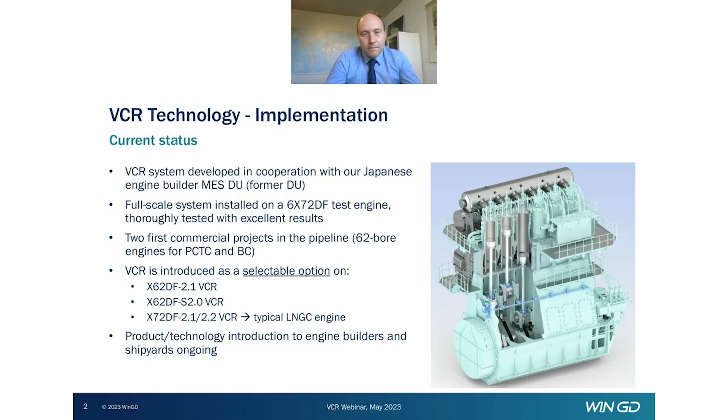What we have seen on premix gas engines in general, a rather fundamental behavior of these engines, is that the compression ratio has to be limited to a certain maximum in order to be able to run under the most challenging conditions, as we call them here.

So full engine load, hot ambient conditions, poor gas quality, for example. But this also means there is a bit of a compromise in diesel mode, where the efficiency is somewhat reduced if the compression ratio has to be limited to a lower level than what you would typically have on a diesel engine.

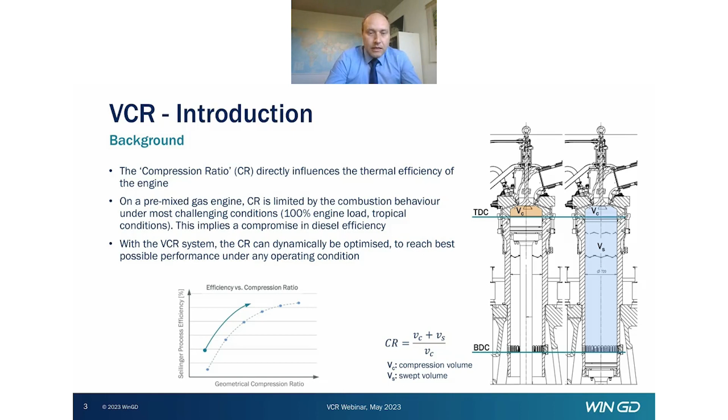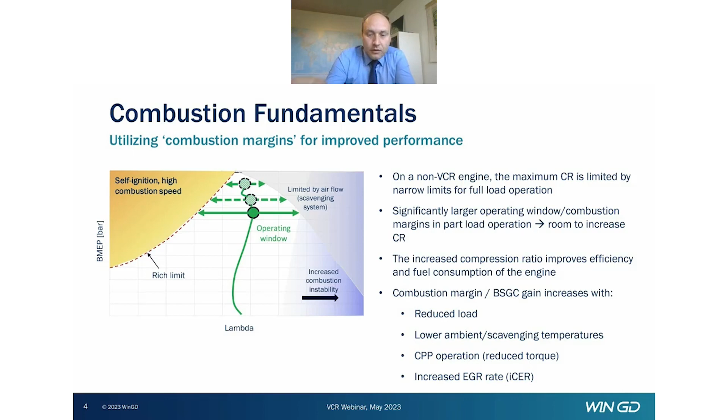The compression ratio can increase as the engine goes into part load operation, up to a maximum compression ratio that is set at low loads.

In diesel mode, though, the compression ratio can be kept constantly at a high level, similar to that of a conventional diesel engine. That also allows recovery of diesel fuel consumption to a similar level as on a diesel engine.

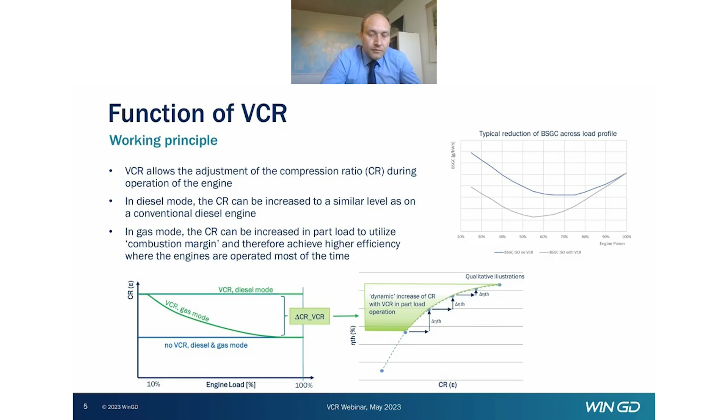So how is the compression ratio being changed? What it is at the end is that, with this mechanism that we have designed, we can change the position of the piston at top dead center.

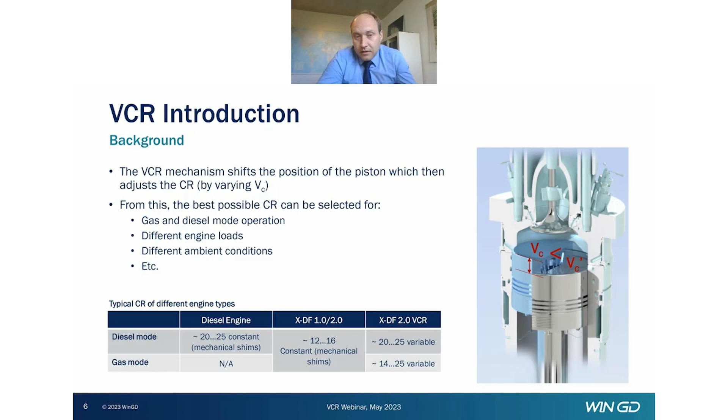The design is very simple, very sturdy at the end of the day. There are a lot of similarities with other hydraulic system designs on our engines, such as exhaust valve drives and so on. The system is designed so that we foresee no specific maintenance between dry dock periods of 5 years, so it's really quite simple and sturdy, a straightforward design.

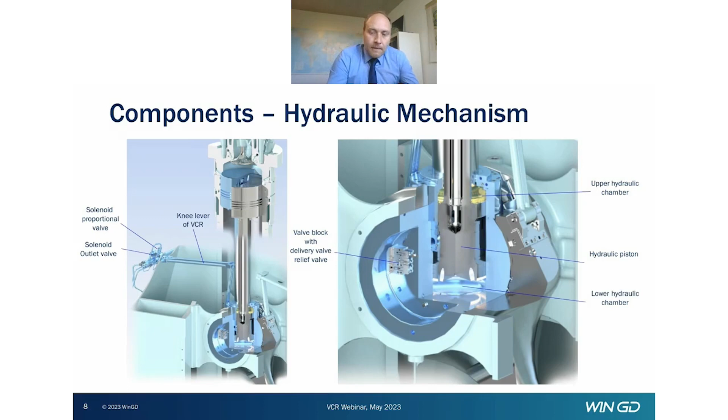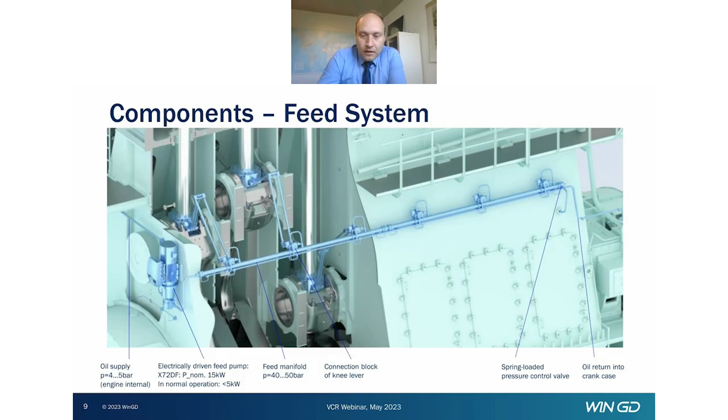Another subsystem is the controls - how the position of the piston is controlled. First of all, this is all arranged by the standard WinGD engine control system, which does not need any hardware modifications or module extension or anything. It's simply an update of the control system software that is required.

Then the position of each piston is actually closed loop controlled. There is a position feedback sensor on every cylinder liner that measures the position of the piston in every revolution, and the solenoid control valve then adjusts the position of the piston individually so that it matches the set point.

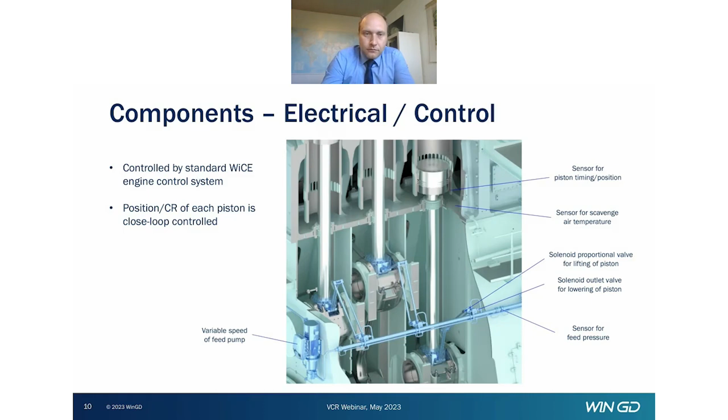Regarding operation of the engines and available operating modes, we do offer a number of operating modes to these engines, but actually compared to a standard X-DF 2.0 engine without VCR, the modes are very much comparable. We have the first 3 modes: gas mode, diesel mode tier 2, and diesel mode tier 3, where VCR is active and fuel consumption is fully optimized to the best possible level. That's the kind of standard operating modes, if we want to call them like that.

Then we have this CSM, or combustion stability mode, which is a standard or fallback mode on every X-DF 2.0 engine. This mode allows the engine to run and burn gas even if ICER or VCR is not working for some reason. So what it will do, with both VCR and ICER off, is work with a somewhat increased injection of diesel fuel in order to ensure stable combustion and still operate on gas, even if these two features are not available.

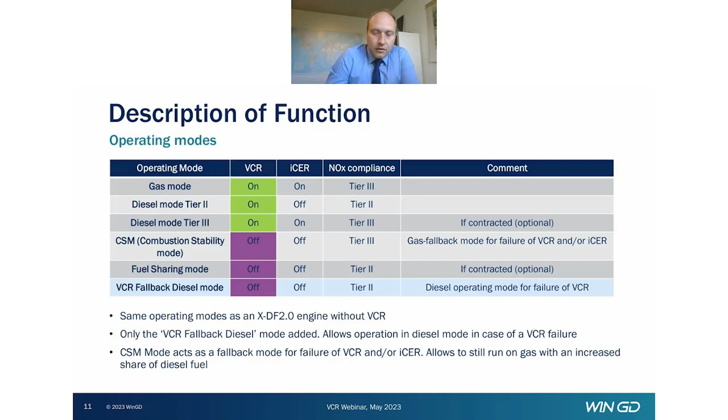That means the engine can go back to diesel mode operation, even if there is a failure of the systems, and it can ensure availability of propulsion. So even if there is a failure, there is no compromise in the availability of the engine as a prime mover. The only compromise is on the efficiency optimization, that it will not run fully efficiency optimized. But as such, we believe that's a simple and straightforward setup on how to do it.

So coming to the actual performance improvement with this feature, and that's really where this feature makes a difference. As I mentioned before, we have seen significant performance improvements. In gas mode, we see a reduction of fuel consumption or gas consumption at part load and low load particularly.

You can see this top right graph showing reductions of 2 to 6 grams per kilowatt hour, depending on engine load. So quite something. In diesel mode, as we saw before, we can keep the compression ratio at the highest level throughout the load range.

So we also see that we have a kind of a BSFC reduction that is relatively constant over the entire load range, and this is rather big, with some 8 to 12 grams per kilowatt hour, depending on the engine type, engine rating, and so on.

So that brings the diesel consumption to a very similar level as of a conventional diesel engine, and that also means that the traditional compromise in diesel efficiency of a lean burn premixed engine has become void, has become obsolete. So that is not the case anymore. We can now provide highest possible efficiencies in both operating modes without a compromise.

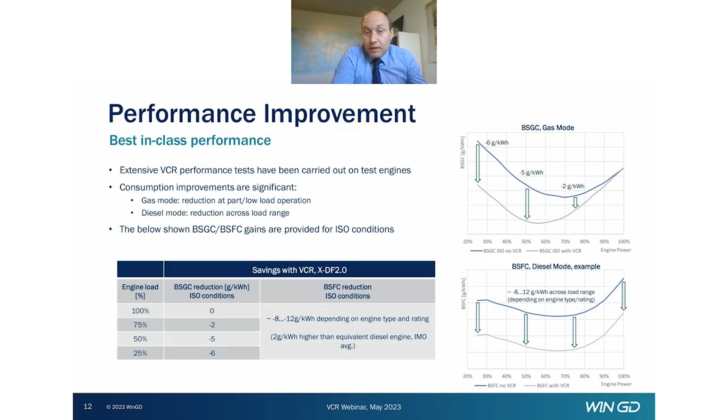We have now used these kind of emission figures to calculate advantages and yearly savings of consumption, greenhouse gas, and finally OPEX of different ship types. And what we've done here is that we have used the consumptions as predicted or as shown on the previous page, and we have assumed typical yearly operating profiles of ship types that you see listed here on the left.

Starting with this 174,000 cube LNG carrier, which is like a typical LNGC vessel with a twin 5X72DF 2.2 VCR. You can see the engine rating here.

Then if it comes to the consumption savings or the savings overall, we have differentiated between GM, that stands for gas mode, and DM, which is diesel mode. So these are hypothetical assumptions or scenarios, assuming that the engine would actually run in gas mode or in diesel mode for the full time of the full year, which is of course not what they do, but this is a case simply to show the potential of the technology and to show what it can do.

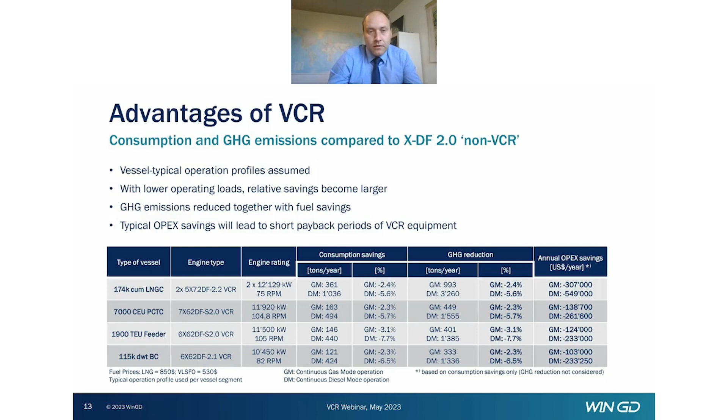A few words on installation aspects, a bit more shipyard or ship design related. I think that's one of the biggest advantages of this technology, because as you saw before, it's fully limited to installation on the engine itself. It does not impact shipyard connections, the main dimensions of the engine, seating, and so on. All remains unchanged. So installation on board a vessel is not affected by VCR as such.

Same goes for the ancillary system. There is no change to the ancillary system specifications, such as pump and cooler capacities, which remain the same, and no additional pipe connections are required. So it's very simple for ship designers and yards to implement this design, as there is no impact on the installation dimensions.

What has to be done, I'd like to mention, is that same as for any new building project or new design, the torsional vibration calculation has to be done, so the TVCs have to be reviewed. There is a difference in the cylinder pressure curves on a VCR engine compared to non-VCR, which means the calculation of the shafting layout needs to be done with the correct excitations to make sure the TVC is fine. But that's the same as for any other new design and new project.

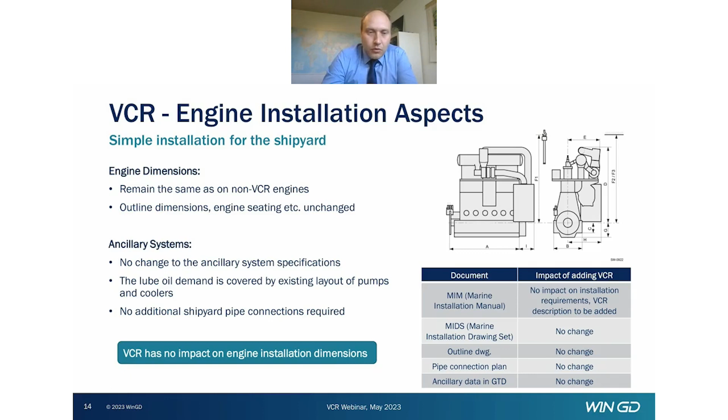A few words on the introduction schedule. First, I'd like to repeat that we are now focusing our efforts on introducing this technology on these three engines: the 72DF, the 62 long stroke, and the 62 short stroke. Those are the three engines where this will come as a selectable option, meaning you will have to select it as an option with the yard and engine builder. We are considering a portfolio rollout to widen the application to other engines, but that will come as a second step depending on actual market demands and priorities.

Further, we prioritize new building projects, but we see a lot of interest for retrofit solutions, bringing this technology to existing installations. Coming back to the installation aspects, I think that's perfectly well possible, because as we saw, all the features fit inside the engine. There's no need to modify anything on the ship side, so it's a perfect fit for a retrofit case.

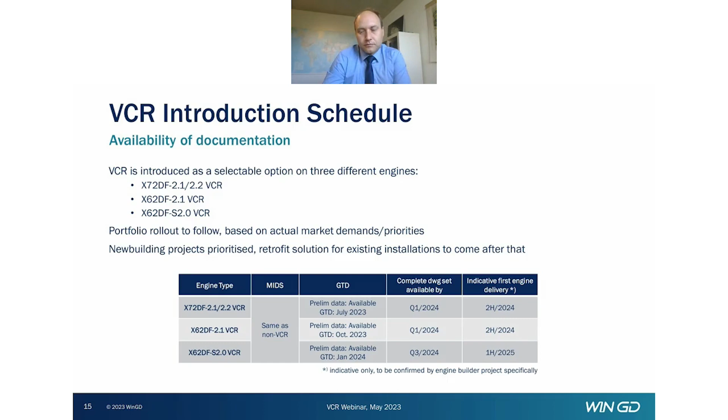So with this, we're coming to a summary. Again, with this VCR technology, I think it's fair to state that we can bring LNG dual fuel engines and technology to a next level in terms of performance and emissions, and that's where the technology provides additional value. As we saw before, reduced gas consumption in part load operation, lower diesel consumption across the whole load range, and elimination of any disadvantage we had before with this technology. Then reduced greenhouse gas emissions, as this comes along with reduced fuel consumption, which every operator will be concerned with in the future.

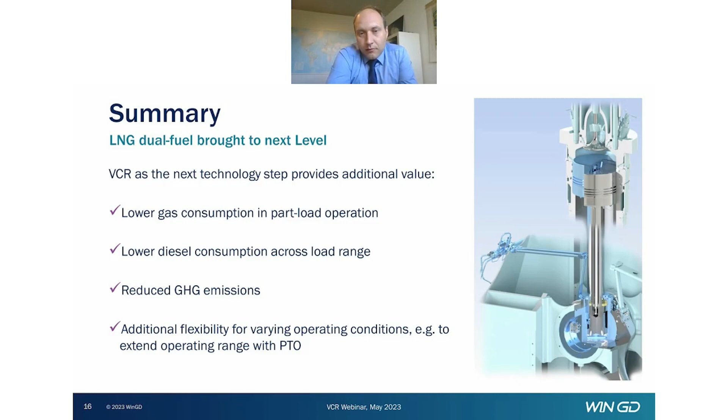Additionally, we see that this system can provide extra flexibility for different operating cases, for example extreme ambient conditions, or as a useful tool to extend the operating range with the PTO, because the engine can flexibly adjust its compression ratio and optimize performance accordingly. All of these points will bring significant advantage and value to the end user, and we're very happy to have it available on a commercial basis now.

This brings me to the end of the presentation, and as announced before, George and I are very happy to take any questions that you may have.

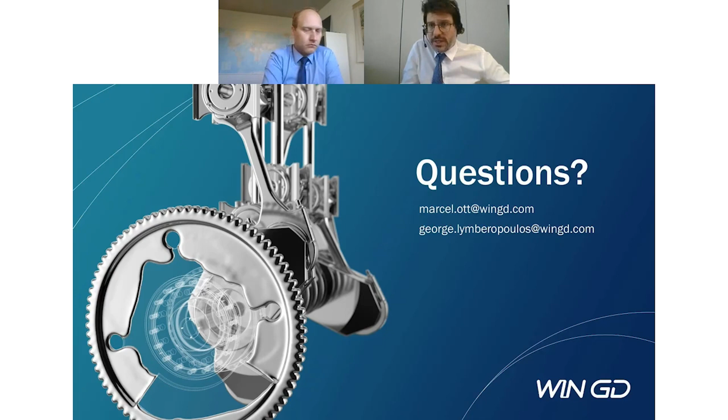The next question is, what is the meaning of 'if contracted, optional' in case of diesel tier 3 mode, as shown here on line 3? That is referring to the fact that a normal standard iCER engine doesn't necessarily have to come with diesel tier 3 capability. It can be, but so far it's also available as a selectable option. Same with fuel sharing, it is available for selection if needed.

Then one of the next questions, similarly, is about CSM. Is the combustion stability mode regarded as a gas fallback mode - equal meaning, different terms? Yes, in case VCR is not available and the operator wants to continue operation in gas mode, he's able to do that with the combustion stability mode, same as we have with the iCER engines today.

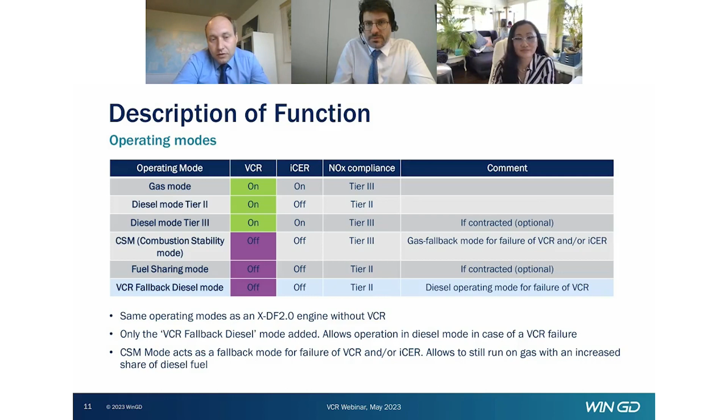Another question is an estimation about the potential return on investment based on the savings shown. I think we have not shown any cost figures here, for obvious reasons - the final pricing will come from the engine builder through the shipyard. We do have some cost estimates which we discuss and review with engine builders, but they will finally provide pricing from their side. But as we saw with the annual savings before, this would typically result in a payback of the extra cost of approximately 2 years or so - fairly short payback and a good investment.